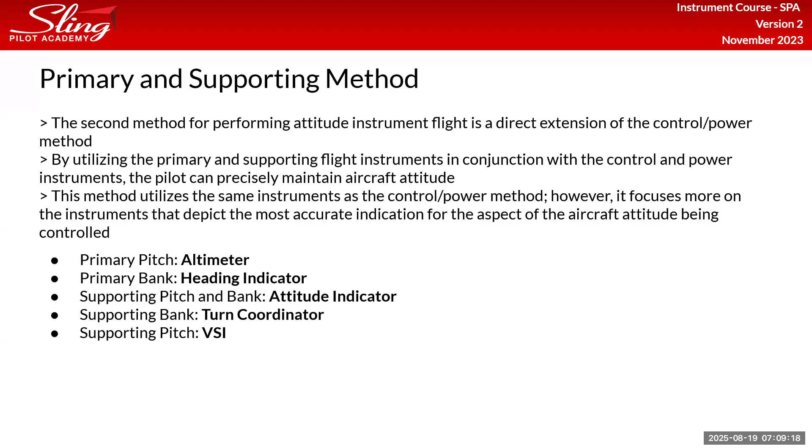So this chart right here, I would actually take a picture of this, because this is useful. For all of these things, they show what is your primary instrument, what is your supporting instrument. Do I think you need to have this memorized? No. But sometimes on check rides they've asked, like, what is your primary instrument for bank, and then what's supporting that banking information. So if you're familiar with this chart, questions like that shouldn't be an issue.

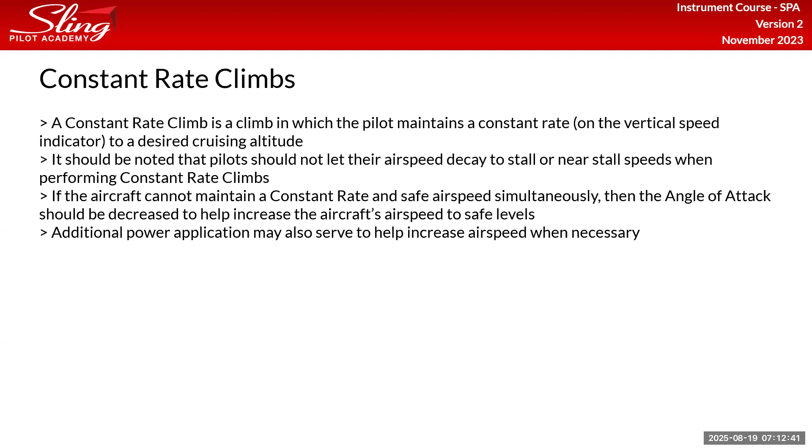Constant rate climbs are important, but probably more important for later on when you guys start.

What's this other slide? Main instrument the pilot will use, blah blah blah, vertical speed indicator. Pilot slows below the target rate during the climb must increase the aircraft's pitch attitude, most likely probably increase the climb rate. If climb rate increases...

Yeah, so obviously if you're looking for constant rate climbs, the VSI is the thing that you look at, right? But there's not many times in IFR flying where ATC has told me to maintain at least a 500 foot per minute climb to this altitude or something. Sometimes they'll say expedite your climb because they want you to climb a little bit quicker, and then I remind them I'm in a Sling and I can't climb very fast, but I do my best.

But usually ATC won't throw numbers at you that say like at least 500 feet per minute or 300 feet per minute or whatever. Does anyone know what our minimum IFR climb rate is? Like the minimum climb rate we have to maintain to be able to fly IFR.

200 feet per nautical mile, which we'll talk about later, but 200 feet per nautical mile roughly translates to about 250 feet per minute. So if you're ever in a position where you are unable to maintain that 250 feet per minute climb, that's something you'd want to advise ATC, like if you have partial power, you're going full power and not able to actually maintain that climb rate.

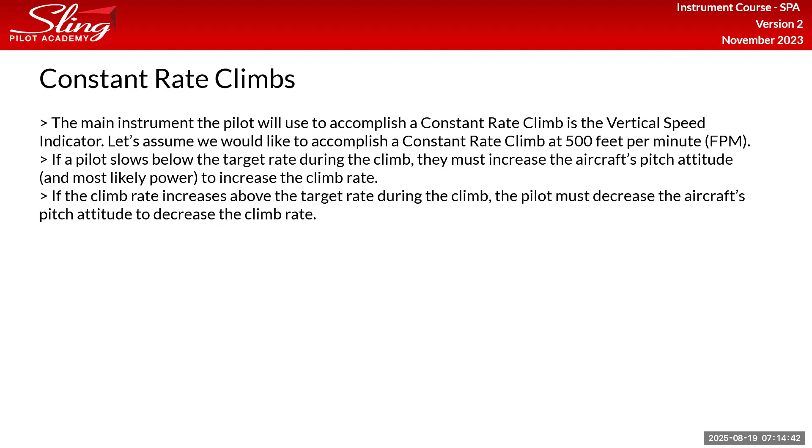What reg is that? Oh gosh. Chad, do you know what it is off the top here? No, I'll look on my notes. Bruh. I don't know what the reg is. It's probably 91.177.

It's mountainous area, non-mountainous area. Does it fall under like the takeoff minimums? Or minimums you need? Crossing departure on runway 35 feet AGL, no turns under 400 feet AGL, and then yeah, I think that 200 is feet per nautical mile. Yeah, I think that's good.

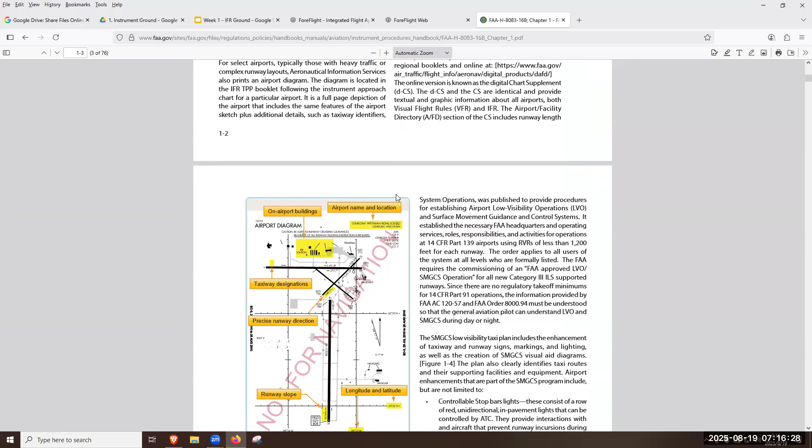I'll also look for where the actual reg is. We do know where it is, because maybe it's not a reg, it might be in the TERPs or something. I'll find that, because I have one, 91.177. Mm-hmm, but also this is a year old binder, so. Well, that rule hasn't changed or anything, so I would assume it would be the same rule. But it doesn't say 200 feet per nautical mile on there. No, I don't see that. I'll see if I can find what that actually is.

But so that you guys know now, the minimum IFR climb rate is 200 feet per nautical mile, which if you're unable to make, that's something you have to advise ATC of. And 200 feet per nautical mile roughly translates to 250 feet per minute, which is something that we read on the VSI, but it's actually based in ground speed. We'll talk about that soon.

Okay, so constant rate descent. Constant rate descent is where the pilot maintains a constant rate on the vertical speed indicator down to a lower desired altitude. The main instrument the pilot will use to accomplish this is the vertical speed indicator. Let's assume we would like to accomplish a constant rate descent at 500 feet per minute.

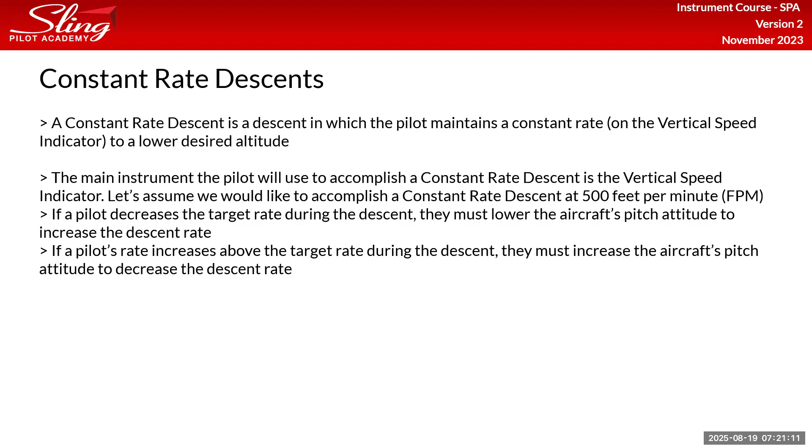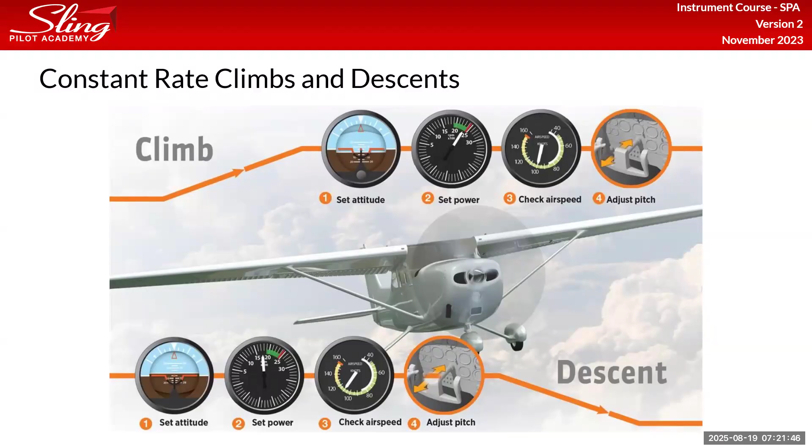So this is kind of like your pitch power trim climbing. Set the attitude, set the power, check airspeed, adjust the pitch as needed. For descent, set the attitude, which it's got right on that first tick mark like you said, set power, check airspeed, and adjust it. I think trim should be in there too, because after you adjust that pitch, you don't want to be holding that pitch. Trim it out so the plane flies itself. You're going to get very good at trimming an airplane after instrument rating.

I didn't find the right reference, but it's in the AIM. 5-2-9. Okay, that's good, so departure procedures, write that down, 5-2-9. We'll define that later.

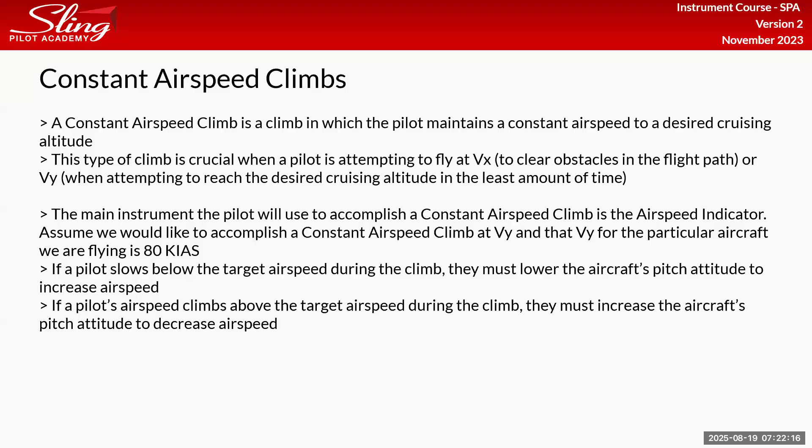I don't know how much I can talk about constant airspeed descents here. Okay, so how do we change our airspeed in straight and level flight?

If I'm trying to maintain straight and level, how do I speed up? How do I slow down? What can I change? Of pitch, power, or trim. If I'm in straight and level flight, going 90 knots, and I want to go 100 knots, how do I speed up and still maintain straight and level? I don't want to climb or descend. Power is the only thing I can change, right? Just increase power. Now if I need to slow down and maintain straight and level, I reduce the power. So when I increase power, what's the plane going to want to do? Climb.

It's going to want to climb, which means I have to apply forward pressure to stop it from climbing, right? And as I apply that forward pressure, once I'm holding a constant amount where I can see the plane is still straight and level, then I trim out that pressure, so now the airplane is perfectly trimmed. That's just in straight and level.

But it's the same thing for descents or climbs, usually descents. If you want to descend at a slower airspeed, you reduce your power, pitch down, reduce the power a little bit, trim it out, and you see we're descending, but at 100 knots right now, and I want to descend at 90. How do you descend at 90 knots instead of 100? What change would you make there?

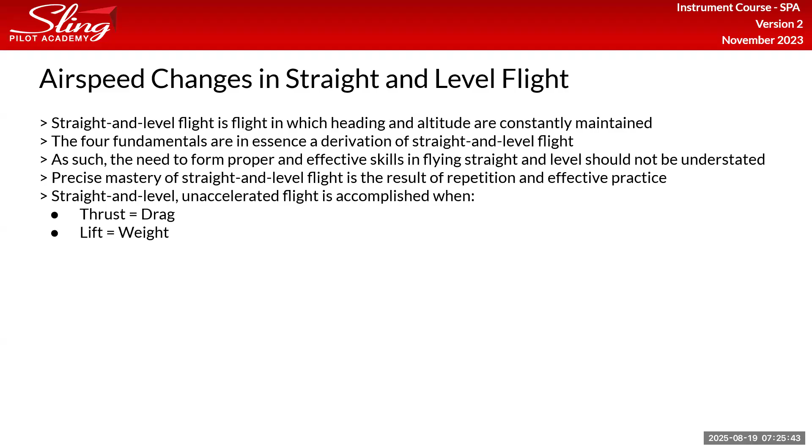Okay, this is everything we've been talking about.

Okay, cool, so turns to headings. A turn is initiated by banking the wings in the desired direction of the turn through the pilot's use of aileron flight controls. In order to remain level and maintain altitude when performing a turn, the pilot must utilize the elevator to compensate for a decrease in vertical lift. If this is not done, the airplane will descend and lose altitude. The pilot uses rudder input to offset any adverse yaw and keep the airplane coordinated throughout the turn. The rudder does not turn the airplane and is used to maintain coordinated flight.

So we all understand how to turn an airplane. Just because you can't see outside, it's still the same thing. You're going to apply a little bit of bank, maybe a little bit of back pressure, and then as you're applying that bank, we're also adding just a little bit of rudder during the entry.

Do we have to hold rudder in during turns? Like when you're turning, do you have to maintain a constant rudder pressure?

Not necessarily. It's not like, okay, I'm turning left, so I'm applying - it's not a one-to-one relationship where the more left aileron I apply, the more left rudder I also need to apply. Because all your rudder really does is correct for the adverse yaw that happens when you roll into a turn.

So what happens if you roll into a turn - I've got my airplane right here. I start rolling into a turn, I roll this way, and I don't use any rudder. What's the nose going to do? Fall - can you go that way? Right, that's what I'm looking for. It's going to, your adverse yaw is going to pull the nose the opposite direction. So really, the only reason we have a rudder is to correct for that, and besides being coordinated, it's to correct for that tendency of the nose to swing over to the right.

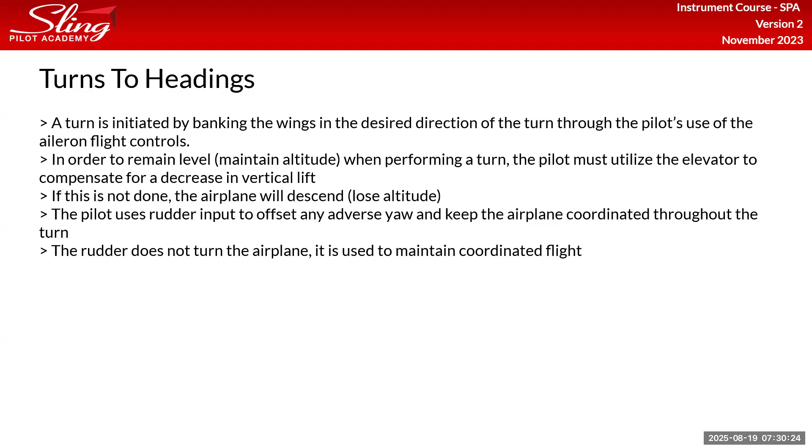Bank angles: a shallow turn is 20 degrees or less. Medium is 20 to 45. Steep bank turns are 45 degrees or more.

Does anyone know what a shallow turn would be characterized by? If we're in a shallow turn and I let go of the stick, what should the plane do automatically? Say I roll it at 20 degrees of bank, or maybe 15 degrees of bank, and I let go of the stick. What's the plane gonna want to do?

Right, in a shallow turn, the planes are designed to be stable, inherently stable. So if it's just a shallow turn and I let go of the stick, the plane's gonna want to come back to straight and level, right?

A medium bank turn, around 20 to 45 degrees, theoretically you could let go of the stick right here and the plane would just maintain that turn without you having to do anything.

And then steep turns, anything above 45 degrees, we have an overbanking tendency. If I let go of the stick and I'm not holding it anymore, the plane won't want to maintain that, right?

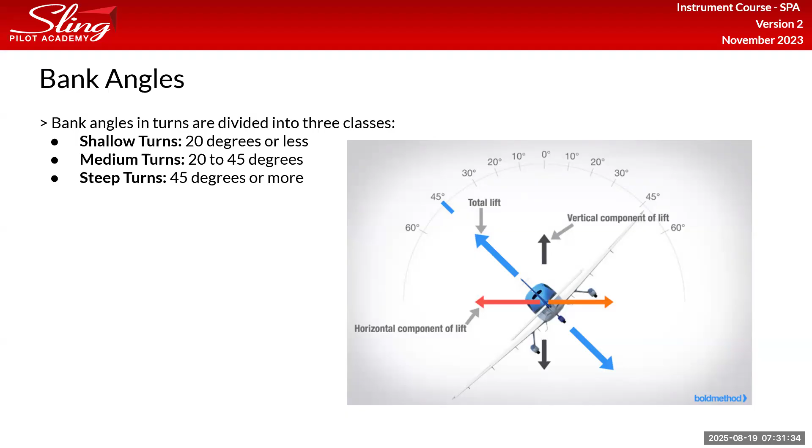I think you guys know what the horizontal lift component is. It's what's responsible for making us turn. So when we turn, we split the lift. When we're straight and level, all the lift created by the wings is going straight up. As I begin to turn, that lift is still pointing straight up from the wing, and most of it is still going upwards. But a portion of it is now pointing in the direction we're turning in. That portion pointing in the direction we're turning is the horizontal component of lift, which is responsible for making us turn. Does that make sense?

That's a review of just basic aerodynamics that we should have covered in private.

But basically, how do we get more of... so you're rolling into a steep turn. What are you going to have to do to maintain altitude in the steep turn?

If you add power, yes, power helps. Back pressure—it's back pressure because we're pulling back on the stick, which is increasing the angle of attack. We increase the angle of attack, which increases the amount of lift we're producing.

And power in steep turns helps prevent us from getting too slow. Because if we didn't add any power in, and I'm just increasing the angle of attack as I'm rolling into the turn, my airspeed is going to start dropping. So it does help—it helps with maintaining altitude as well.

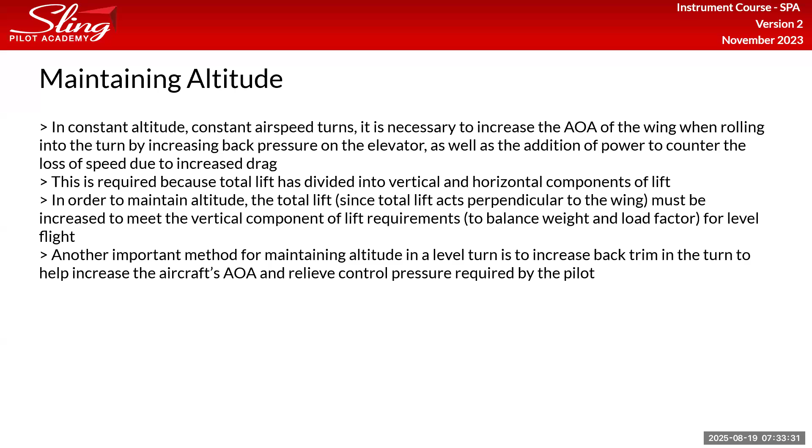Okay, kind of just talked about this, right? When you're turning, you have to increase the back pressure. If you're getting too slow while you're turning, increase the power a little bit.

Coordinated turns—yeah, so many slides on this stuff, guys. We know how to step on the ball.

So does everyone know the difference between a slipping and a skidding turn? If you're slipping or skidding, what the ball would look like? I have a way that I kind of memorize it, which I think makes sense.

So I like saying that the ball on the inclinometer is a visualization of what our tail is doing. If I'm over here—you'll get this question on your written test, I'm pretty sure.

So these are two guys right here, and that's the middle thing. Let's say for this one, the ball's right here, and for this one, the ball's right here. So for this guy, the ball's deflected a little bit to the left, and for this guy, the ball's deflected a little bit to the right.

Okay, so now let's say we're viewing the airplane from behind here. This is the body of the airplane, those are the wings, right? So I'm in a left banking turn, and as I'm in that turn, the ball is kind of swung slightly up to the left. Is that a slipping or a skidding turn? That's slipping. Okay, it is a slipping turn.

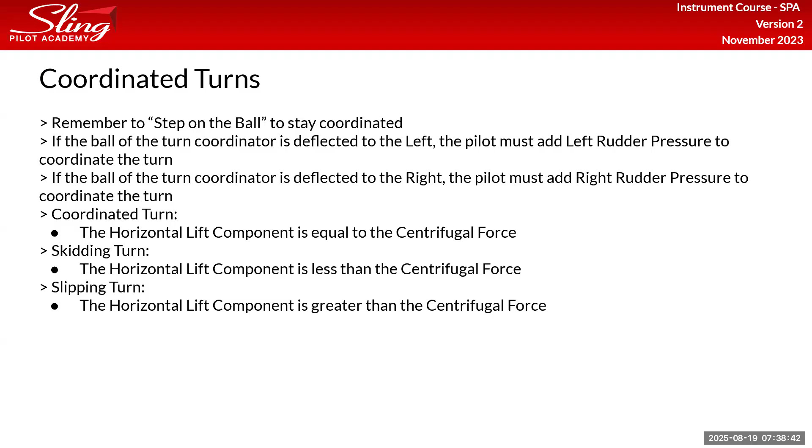Yes, we're on day 2. Oh yeah.

Warm up: your instruments say you're straight and level, but your body is screaming at you that you're in a left-hand turn. You start to put in some right aileron to counteract the feeling of the left turn. What's happening here and what can happen very soon? How can you fix it?

Community building. What's your favorite airport that you've flown to?

Okay, so in the scenario, what is this pilot probably experiencing? What is the name of that feeling? I don't know, leans or is that inversion? It's the leans, right? I think it is the leans. Okay, I'm leaning towards the leans here.

Andrew, what's your favorite airport that you've flown into? Probably Sedona, just because of the FBO. Oh, free ice cream. Sedona is the best.

I love that airport. Apparently those wine bottles, you used to be able to get them for free. That's what people told me, yeah, and they got rid of it. I bet it's because they have too many drunk ATP students flying in there, taking bottles of wine. They just used to give out bottles of wine. That's ridiculous, insane. They have a whole wall of just wine, and now it's empty. They don't fill them up anymore, or don't keep them stocked.

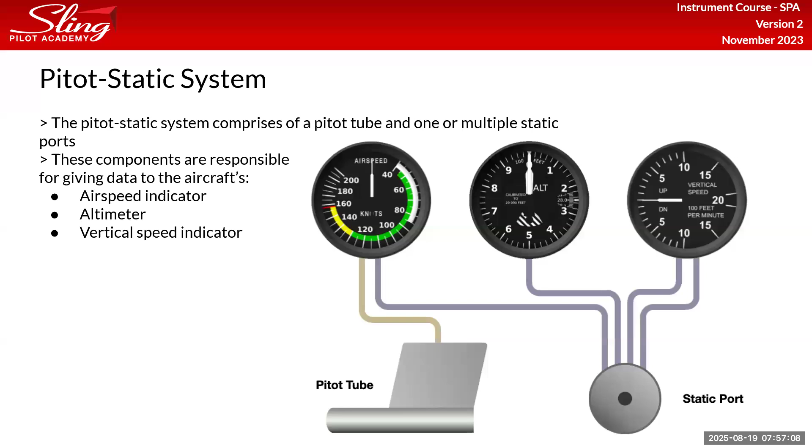It's like so many, if you need more notes, I took so many notes in my IFR ground, I'll take that notebook home. Yeah, I'm just here bumming around, listening to multi-mic. Struggle.

You know how for 61.109, well it's all 61.1, the 3 hours of flight training within the previous 2 calendar months, does that have to be done with me? Because my student did it with somebody else, but not with me, but I gave him the endorsement. I don't think it has to be done with you. I think they just have to have logged the training. Great, yeah.

I mean, I think if you're the primary CFI endorsing them, as long as you've seen them do all this stuff and feel confident endorsing, then that's fine as well. Yeah, I think you're good. Thank you, that's what I was waiting to hear. As your student, you're my student. You're doing great, Chad, you really are. You're just kidding.

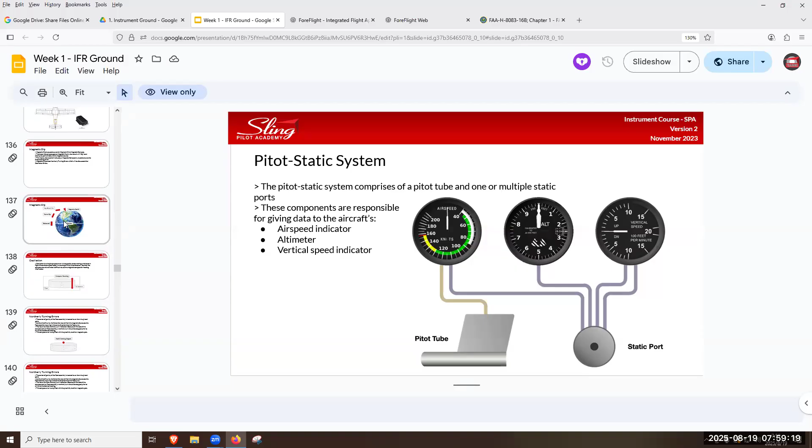Expose your balls. Morning. Morning. I don't want to hear from you. Clearly not. Walks in, talks shit about her own student, doesn't elaborate, leaves. That's a sling, Sling Pilot Academy, that's the sling when don't know what magnetic dip is.

With the magnetic compass? Because some people say it's the magnetic compass, but I think it's the dip I bring to the Super Bowl party, because it's absolutely magnetic and everyone wants some. Know what I'm saying? I don't need that, it's been the last 3 months. I hope you know, every single time. I know that joke is dumb and I make it every single time we talk about magnetic dip because I think it's a great joke. It's funny, it's hilarious, like this dip, absolutely magnetic.

All right, but what's the recipe? It's actually just like an onion dip, you know, you just cut the onions up, you throw them in a pan, you kind of caramelize them up a little bit.

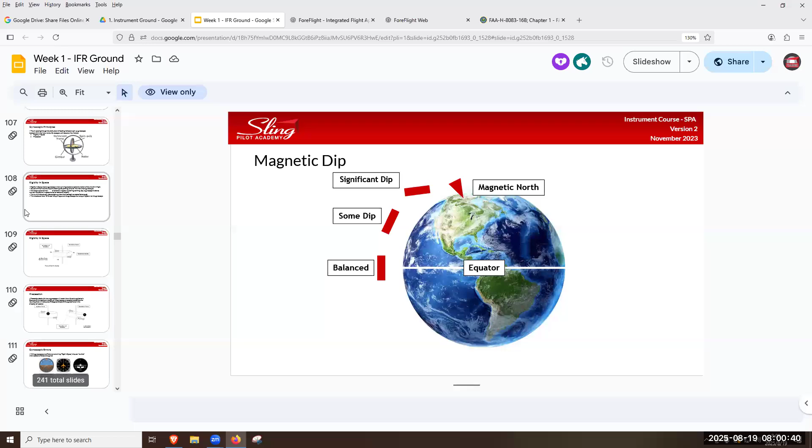Speaking of dips, you go to Trader Joe's, right? I go to Trader Joe's. I went there yesterday. In Liberty Station, right? Good one. Actually we got lazy. But you ever had Trader Joe's buffalo chicken dip? Of course, it's so fucking good. I think I've had too much of it to the point where I've started getting sick of it. It's impossible for me, that stuff is just so addicting.

It's good, it's very good. I guess make a sandwich of that stuff. My wife and I get the tzatziki, it's funny, the regular tzatziki is not as good as the vegan tzatziki. Seriously? Yeah, the vegan one's so much better. It tastes like more, I don't know, I feel like it's a little bit thinner, which I kind of like, I don't like it to be super thick.

Have you had the hummus, like the jalapeno hummus, the 3-layer hummus one? That one's so good, I love that one. What else did I like that I get from there? Yeah, that's good, it's pretty nice, pretty good.

See this misery, I read this anytime I want to go to sleep. It's great. How was your first night in the hospital? I'm dying, I was gonna come back but I'm just tired. It took me forever to clean that room, I was gonna come back last night but then I got tired and fell asleep. I swear I cleaned that room, there was so much dust.

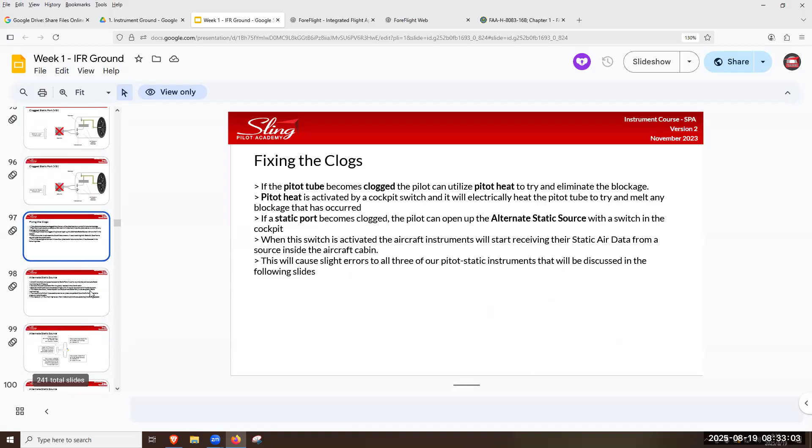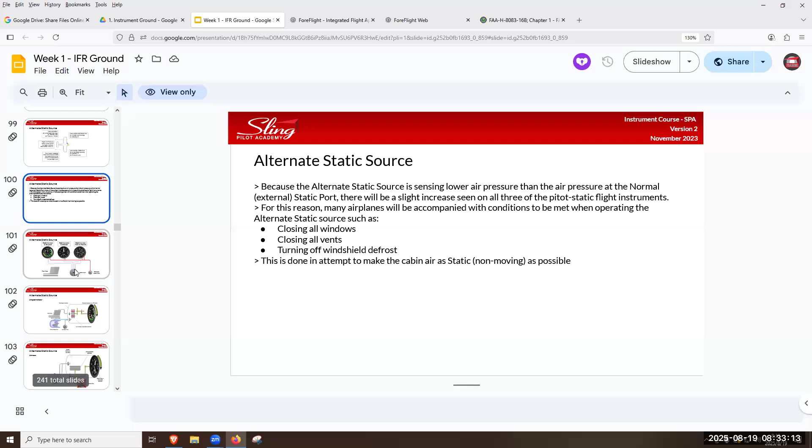I have a question - do you think we could get a copy of the slides? I think so, I think they put them on a Discord or something. I don't know, I remember Corey sent me his slides that he made. I think I have those somewhere.

They're pretty much identical to the slides. He made slides? Yeah. Oh really? Yeah, dang, better than me. We didn't make them specifically for my class, it's just he already had it.

Gotcha, I'll ask Aaron because I'm pretty sure you can send this - Austin would always have the slides pulled up on his iPad during class. So you do have access to the slides somehow. I'm going to share them too, because Corey would share documents, he'd just send it to us. Okay, I'll share it with you at the end of class.

Yeah, they used to have it where you could come up and put your email in there to share it with yourself. I don't know if that's still possible - it probably is. I just don't think these are secret documents or anything, but not a lot - you can only learn these in class.

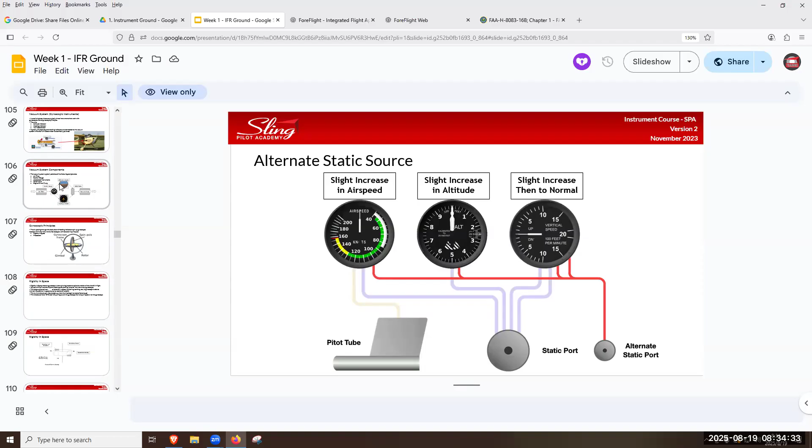Vacuum system, okay. We really need to clean the house - my wife says I need to vacuum. I wasn't even joking, this is really bad. Cool.

So traditional instruments - we have gyroscopes, which are operated off the vacuum system, like in a 172. You guys probably learned the vacuum system. So the three instruments typically run off the gyro are the attitude indicator, the heading indicator, and the turn coordinator.

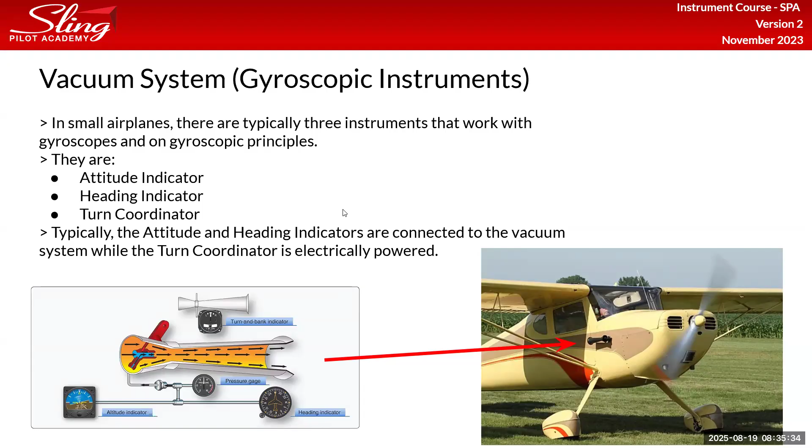Actually guys, I have the best video to show you guys.

And simply, we work hard to keep things simple, and nature works even harder. Gyroscopic instruments include the attitude indicator, the heading indicator, and the turn coordinator. These are considered gyroscopic instruments because each relies upon a gyroscope to function. They can be driven by air suction or electricity, and provide the pilot with pitch, bank, yaw, and heading information. A gyro is a heavily weighted spinning disc able to maintain its position and orientation. Gyros operate based on two principles: rigidity in space and precession. Rigidity in space refers to a gyro's ability to remain in a fixed position.

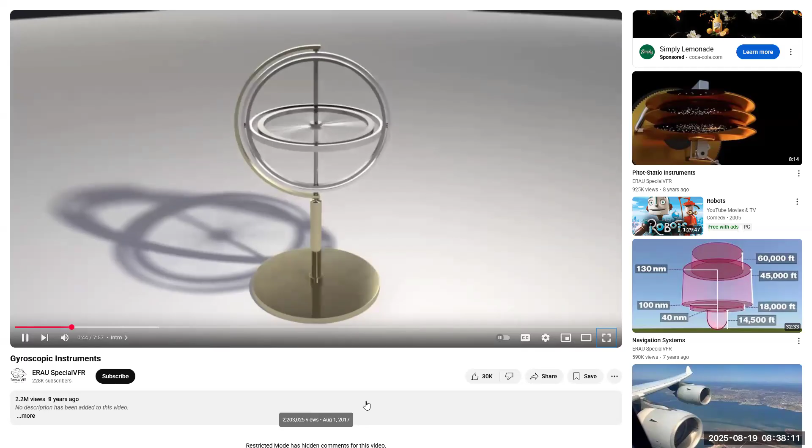Rigidity in space refers to a gyro's ability to remain in a fixed position in the plane in which it is spinning. By mounting the gyroscope on a set of gimbal rings, the gyro is able to rotate freely in any direction. Thus, if the gimbal ring rotates, the spinning gyro will remain in the same plane in which it was originally spinning.

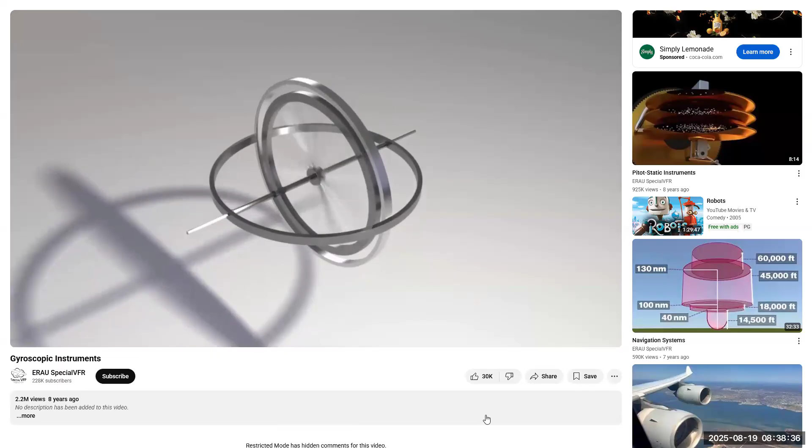The other property of the gyro is known as precession. Precession is the tilting or turning of a gyro in response to a force. For instance, a small force is applied to the gyro whenever the airplane changes direction. However, instead of the gyro responding at the source of the force as expected, the result will instead occur 90 degrees ahead of that point in the direction of rotation. What this means to you is that sometimes the instruments may have some unwanted errors.

Hold on a second. So he talked about rigidity in space - I cannot say that today - rigidity in space, and precession. So if someone was going to ask you what is rigidity in space, can you explain that to me? Simplify it: I have a spinning top, and I spin it right here, and as long as it's spinning, it's maintaining that upright position. That's rigidity in space. That's a property of a gyro - as long as it's spinning, it's going to maintain that upright orientation.

Versus precession - I believe this is Newton's second law. This is a definition that you kind of just want to have memorized: a force applied to a gyro is felt 90 degrees ahead in the direction of rotation.

So what do we have in our airplane that kind of acts like a gyro when it's spinning, and you might feel it a little bit on the takeoff roll? Right, the prop is spinning, and as it's spinning, we're going to feel a little bit of the effects of the gyroscopic precession. So when I pitch up and I'm climbing away from the ground.

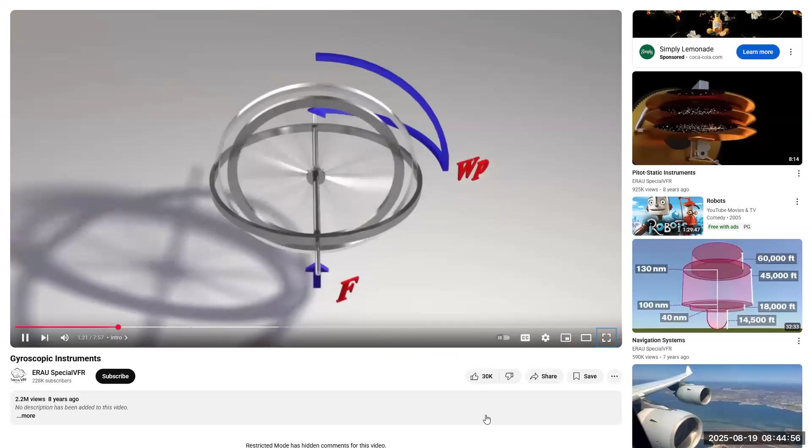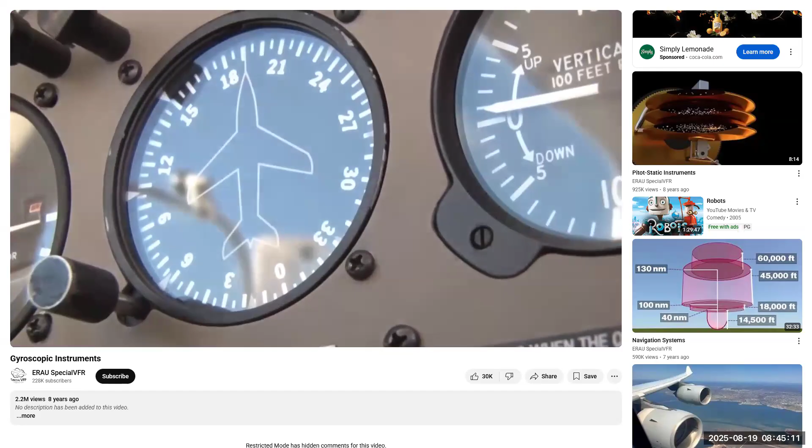This results in a slow drifting, with minor errors 90 degrees ahead of that point in the direction of rotation. What this means to you is that sometimes the instruments may have unwanted errors, such as slow drifting and minor erroneous indications. The good news is that all gyroscopic instruments have ways to either automatically or manually correct for this precession error.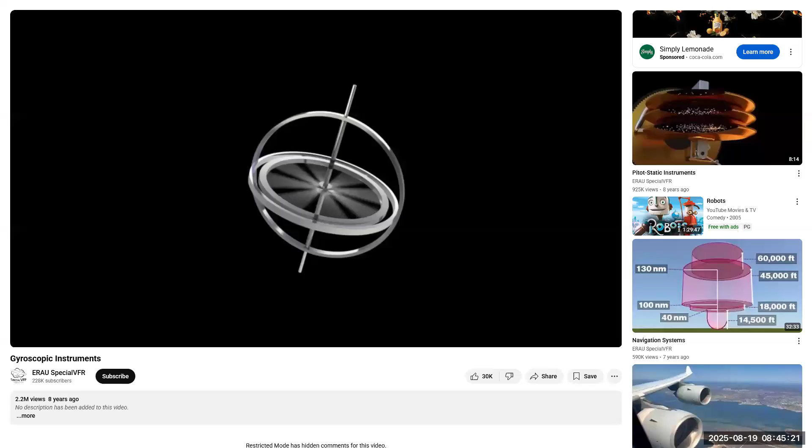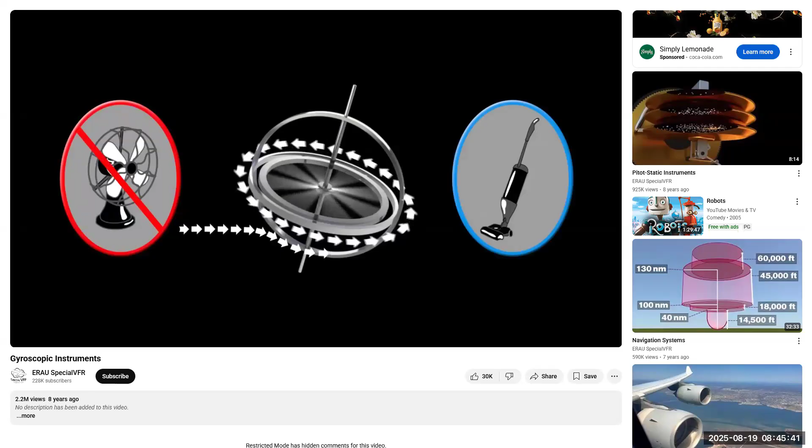In order for gyroscopic instruments to work, the gyros have to spin at a very high speed. As previously stated, the instruments can be powered by air or electricity. For safety reasons, different instruments are powered by different sources so that if one fails, the other still works. The attitude and heading indicators are typically powered by air, and the turn coordinator by electricity. The spinning of the gyros with air is accomplished not by blowing, but sucking air around it. A vacuum pump connected to and powered by the engine draws filtered air from the cabin through the instruments, spinning the gyros, then dumps the air into the engine compartment.

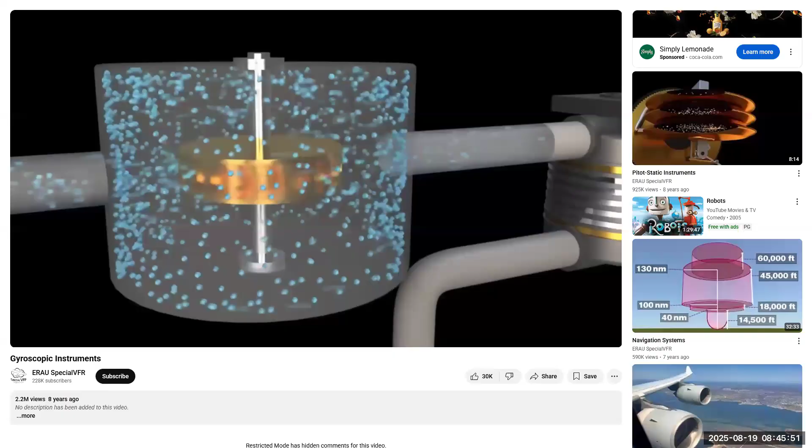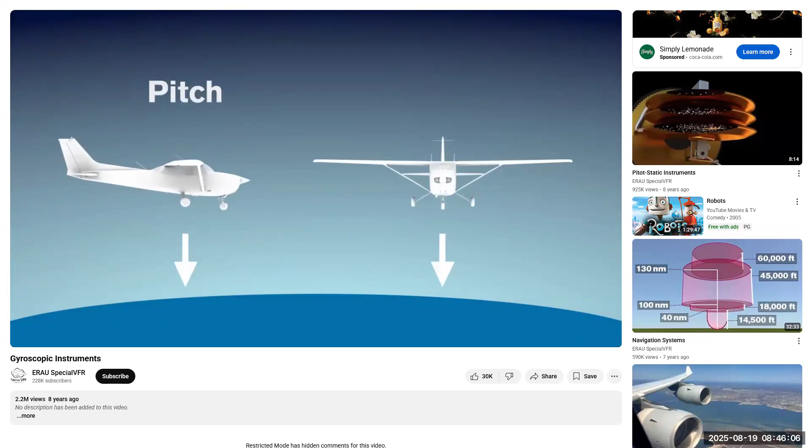Let's look at some of the different instruments that use gyros. The attitude indicator is used to inform the pilot of the orientation or attitude of the aircraft relative to Earth. It indicates pitch, the fore and aft tilt, and bank or roll, the side-to-side tilt. Through the use of an artificial horizon and miniature airplane, the instrument depicts the position of the airplane in relation to the true horizon.

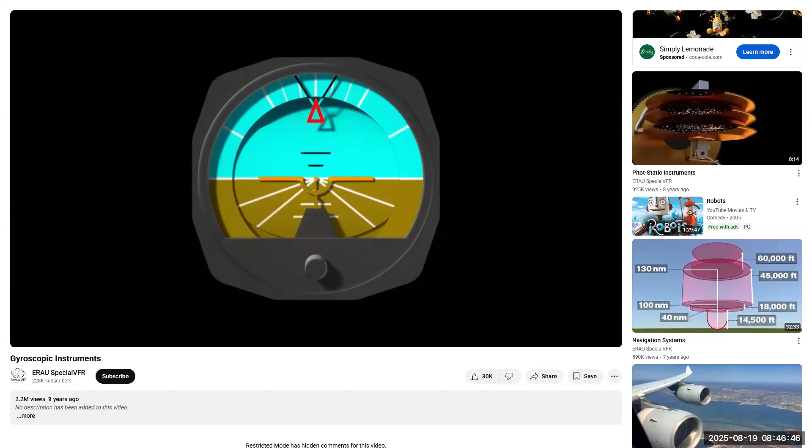This is especially useful when the natural horizon is obscured by clouds, visibility is poor, or when flying at night. Along the outer rim are tick marks indicating bank at 0, 10, 20, 30, 60, and 90 degree angles. Degrees of pitch are located above and below the artificial horizon in either 5 or 10 degree increments. At the top of the instrument is a small triangle that points to the correct bank angle the plane is in. The center of the miniature airplane lines up with the current pitch the plane is in.

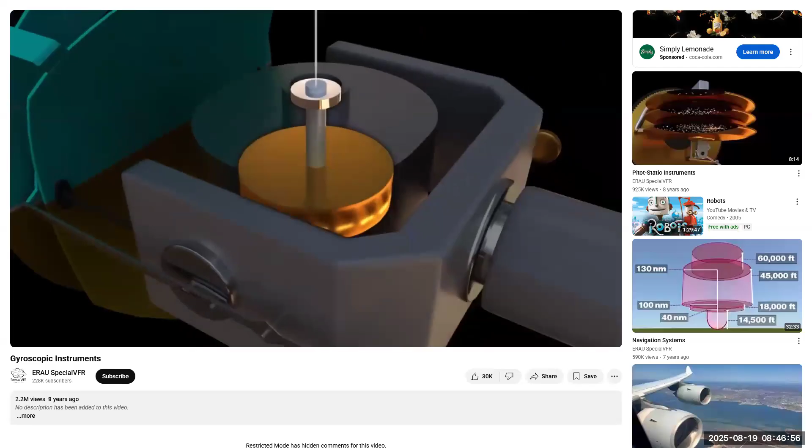The gyro in this instrument spins around the vertical axis, meaning the gyro rotates level with the horizon. The two gimbals holding the gyro allow it to move freely and maintain its level orientation as the airplane maneuvers. Connections to the instrument face will then show the aircraft's attitude to the pilot.

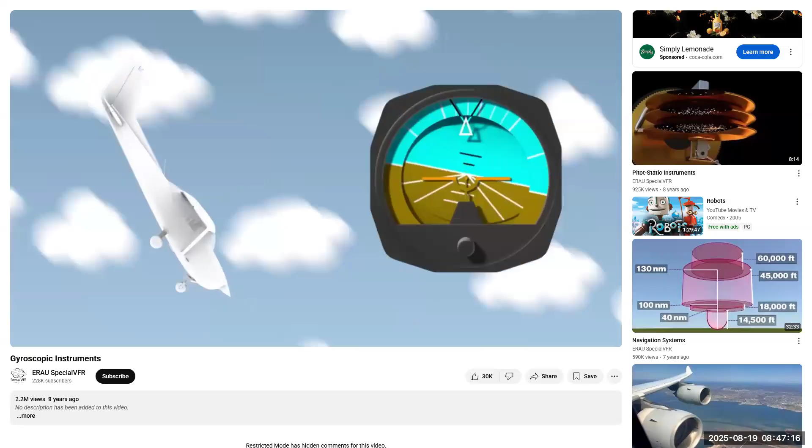Note that if the airplane is experiencing an excessive pitch or bank, or if the vacuum pump is not providing enough suction to spin the gyro, this instrument can read inaccurately. Heading indicator.

The heading indicator senses the airplane's movement and displays heading based on a 360-degree azimuth in 5-degree increments. The tick marks are labeled every 30 degrees, with the final zero omitted. For example, the number 6 indicates a heading of 60 degrees, and 21 indicates a heading of 210 degrees.

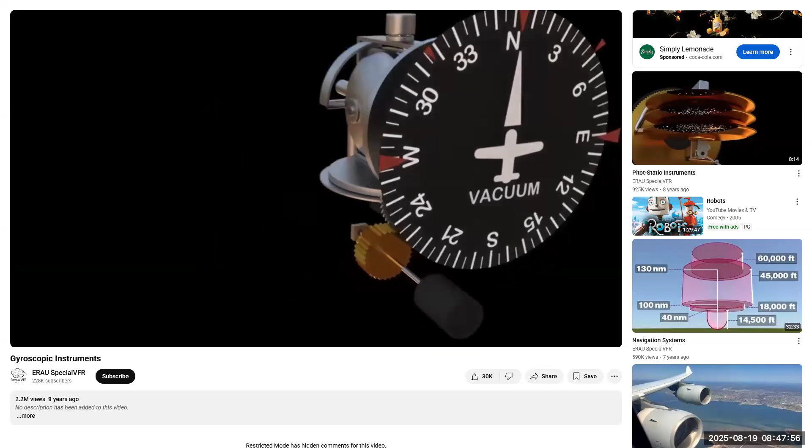The heading indicator does not have any built-in heading sensing ability, so at the start of every flight, after the engine is running, the pilot must realign the instrument to the correct heading, referencing the aircraft's magnetic compass. To accomplish this, push in the knob on the lower left side of the instrument. This disconnects the gyro from the compass card and aligns the gear of the knob with the gears connected to the compass card. When complete, release the knob and the gyro will reconnect to the compass card.

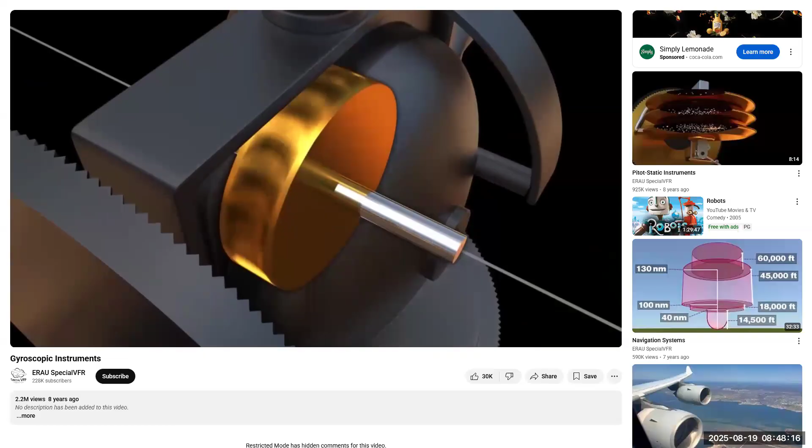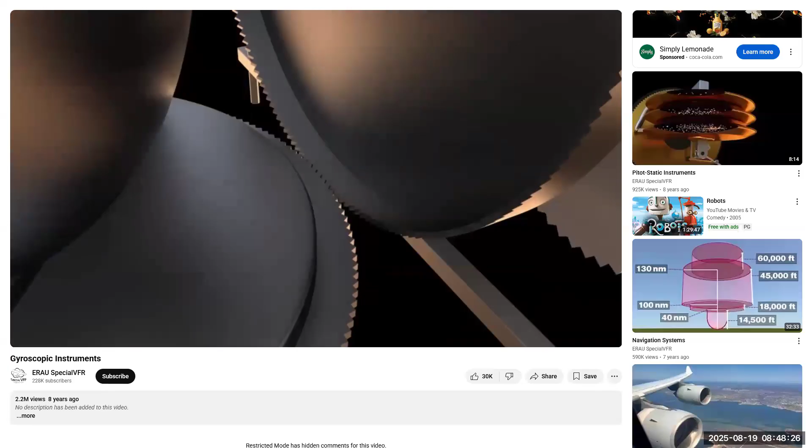Unlike the attitude indicator, the heading indicator is oriented so that only the vertical axis is used to drive the display. When the aircraft turns, the gyro and attached main drive gear remain in their original orientation. This causes the main drive gear to rotate the compass card gear, which then rotates the compass card on the face of the instrument.

Note that, due to friction and precession, the heading indicator may slowly drift away from the correct heading. Because of this, the pilot should double-check the accuracy of the instrument against the magnetic compass and realign as necessary. This should be done roughly every 15 minutes or so. Keep in mind, if the vacuum pump is not producing sufficient suction when the engine is idling, the drift may be greater.

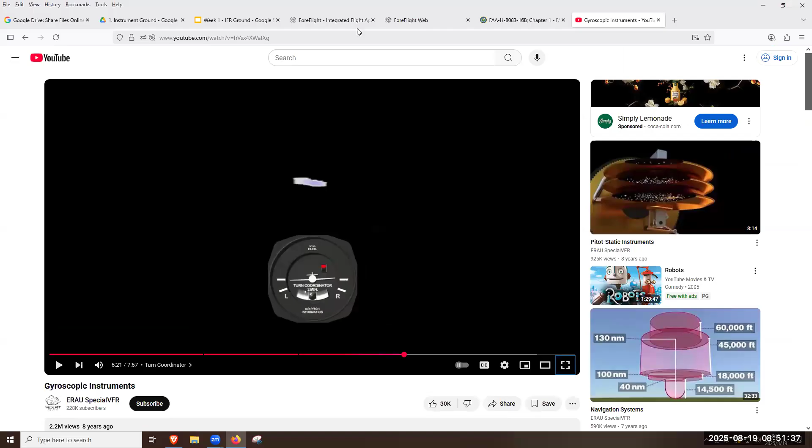So what did we cover? I think the next things are the magnetic compass and then the errors and stuff associated with it. So we'll go through that tomorrow.

Good, any questions on anything? We're staying awake, barely.